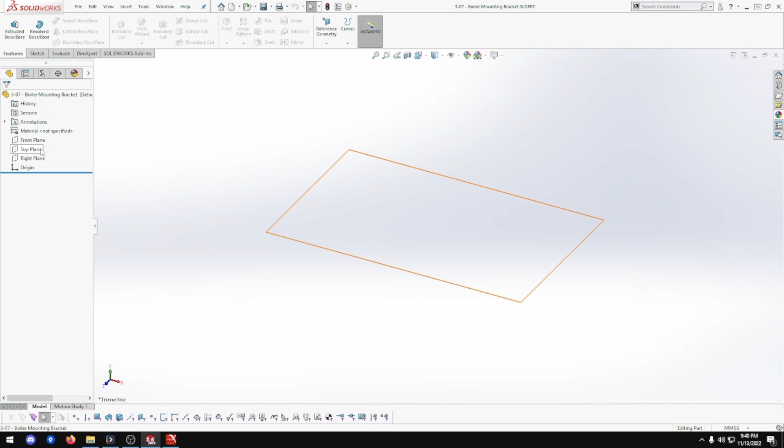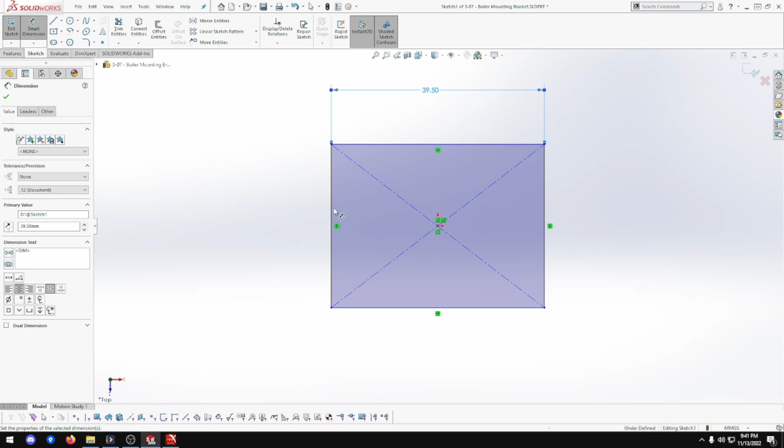Okay, let's go on the top plane, sketch. We're going to do that one. Smart dimension. That's going to be 39.5, and that's going to be 32, and we're going to do an arc from there.

I want to go the other way. Okay, cancel that, let's do that again. That one, so go to this point here first - first time I use this - that point there, then go that way.

There's that one, but that's going to be a radius of 127. So smart dimension - 127. Beautiful, that's good. Bring that in there a bit. There we go.

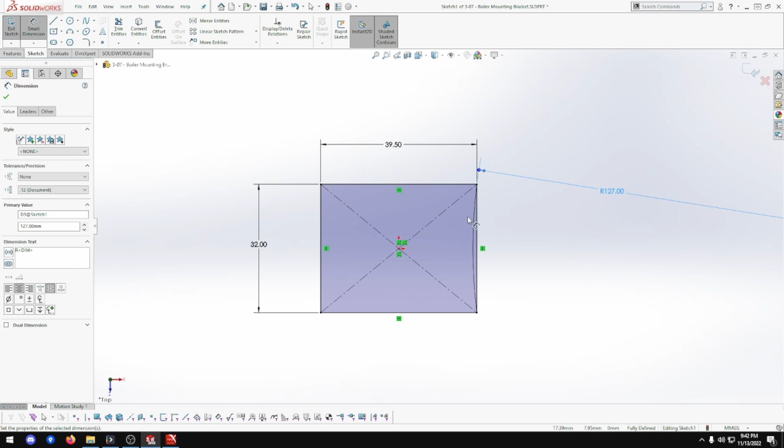Now we want trim, that one there, which will trim that. Beautiful. And that is going to be 5mm thick. Actually hold on, before we do it, there's two circles, we can do that as well. So 16 by 16, but the circle is 8. Let's do that circle.

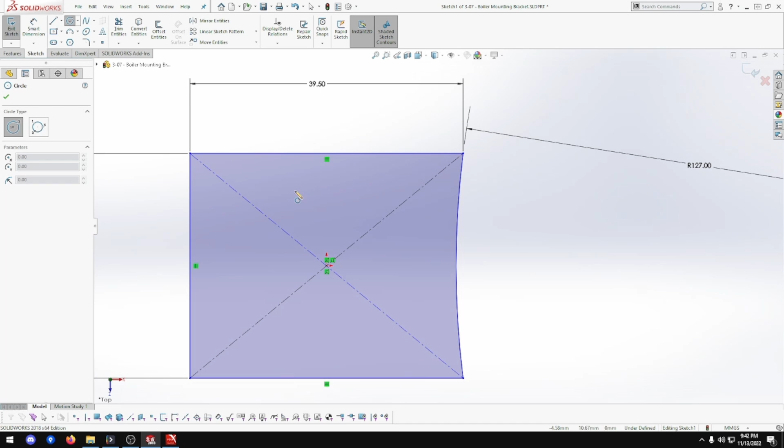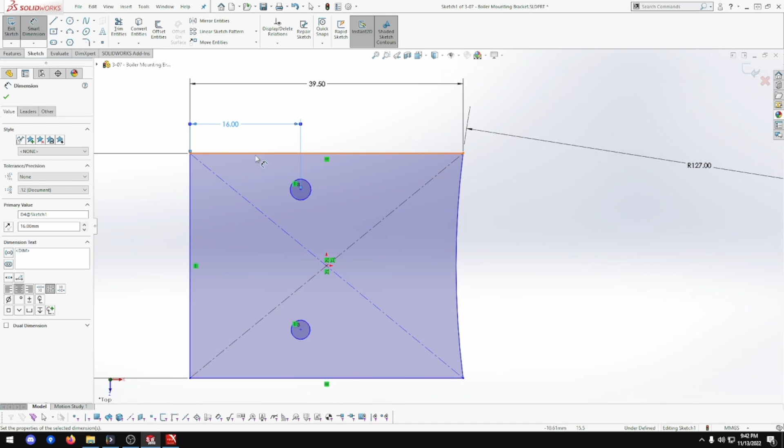Just put it there. Click outside, unhighlight that one. We want that point to be vertical. We want smart dimension - that's going to be 16, wasn't it? Yep, 16. Let's click on that one, drag it in. Ooh, why'd that move?

Something broke on that when I did the cut. So let me just put that one - oh, 19.75, yeah that's right. Okay, there we go, that's locked it back in, so now it won't move. Excellent, so let's just get a sketch, move that up - okay, nothing moves now. So taking that line out breaks it, like breaks the locked-in set if you like, but putting that measurement in fixes that up.

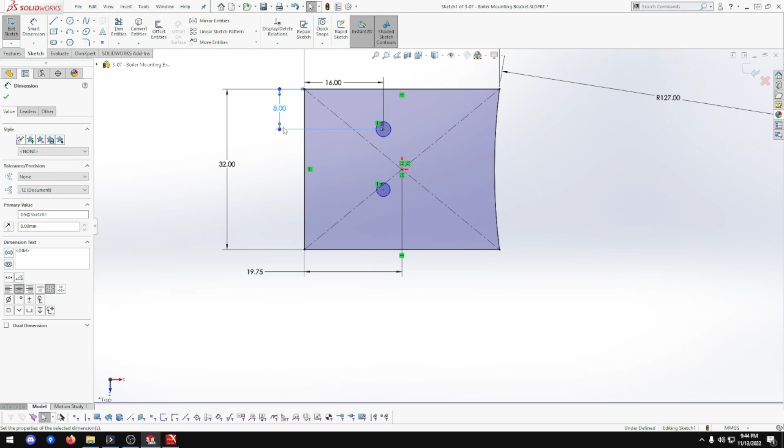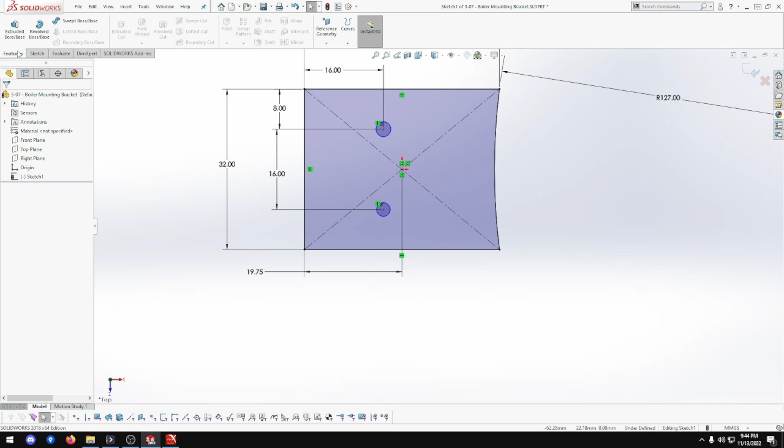Hold on, oh hold on, that should be 8, sorry that should be 8. And this one here, I didn't move after all - 16, that's better, so that's 16. Yep, that's 16 there. We're going to have a radius 8 there, but I'll use the chamfer on that. So that's good, this goes through those 5 - yep, 5mm. Mid plane, and done.

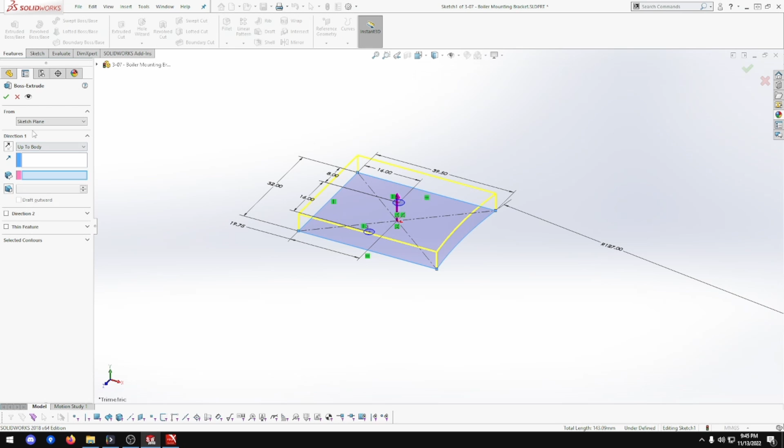Oh, because you got that hole there and that hole there. Select one's plane. What's that not selecting? Select the solid surface body to complete. Maybe that. Okay. Oh sorry, mid-plane, I didn't realize I clicked on up-to-body by mistake. Mid-plane is what I wanted. 5 mil and done, there we go.

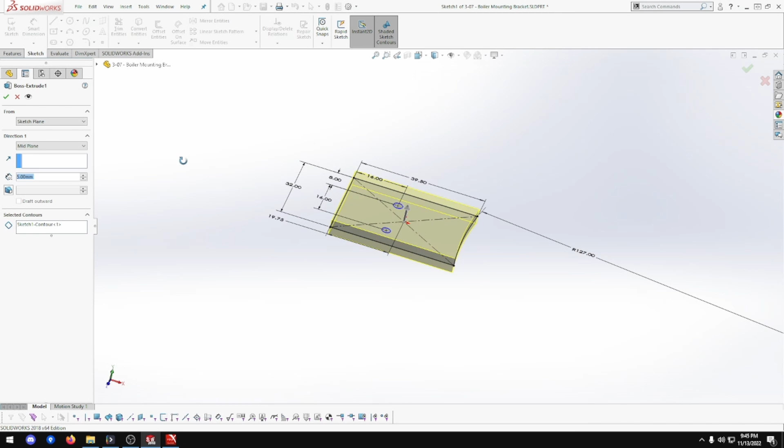Oop, where's the holes going? Hold on. Sketch - no, that one. Where did the holes go in? Oh I never, okay let me get out of that. Let me do that one. The holes are 8 mil. Well, that should still work though.

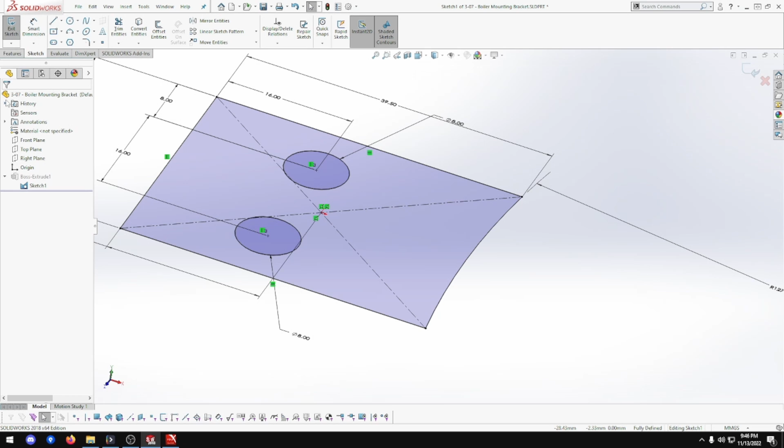Okay. That's a sketch. Okay, why didn't that work? Do that again, and why does that look so big? Hold on, something's not right. Those holes are too big.

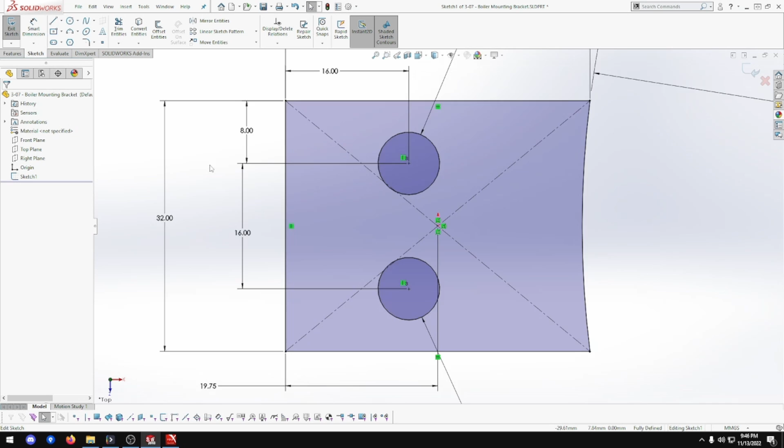Sketch. 39.5. 16. 8. Oh, I looked at it - I'm an idiot, I looked at it wrong. Okay, let me just delete that one. Let me delete that one. This wasn't - oh sorry, yeah there. Delete that one, this should be 50, not 32. Sorry, I looked at the measurements wrong.

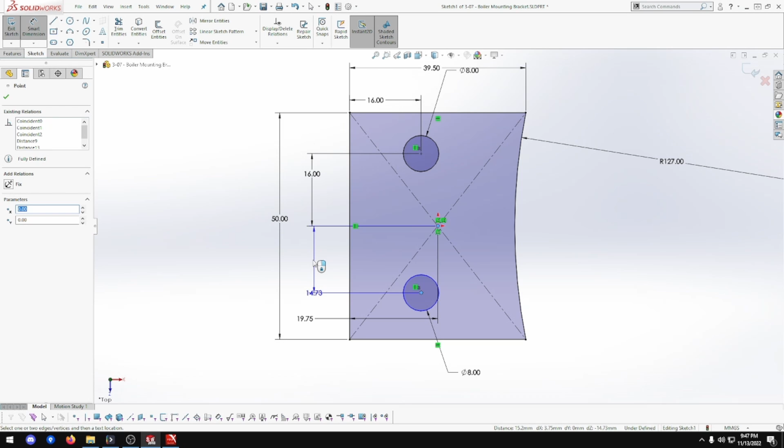Okay, that's looking better, bring that one down. Smart dimension from the center point to that one is 16. Center point to that one. Been a long day at work, I'm tired, so okay, that's done.

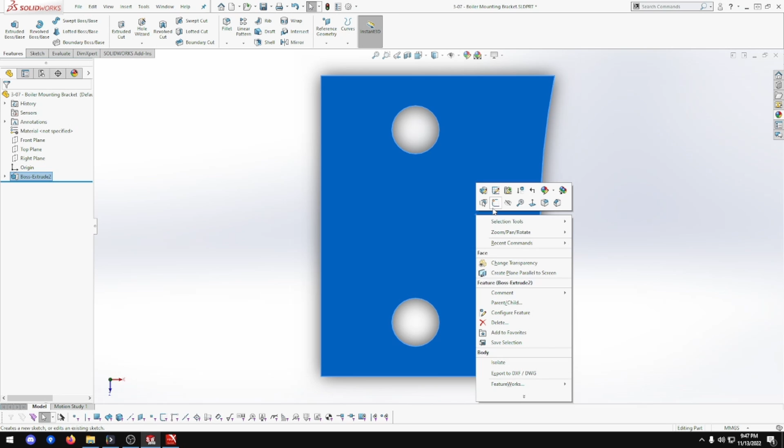So now we go feature, extrude, mid-plane - okay, there we go. That's better, that's better. Okay, go back onto this one and normalize and sketch. So we want this curve here again, which will do this one, to that one to that one. There we go, it's locked in.

We're going to do another one from there to there to there. Now, these two should be - what's that - make concentric, which makes it parallel in a sense, but parallel straight lines. So let's see, before we forget, well that line, beautiful. That line to that line, that should lock it in, beautiful. But we need a measurement which is 5 mil from there to there, 5 mil, beautiful.

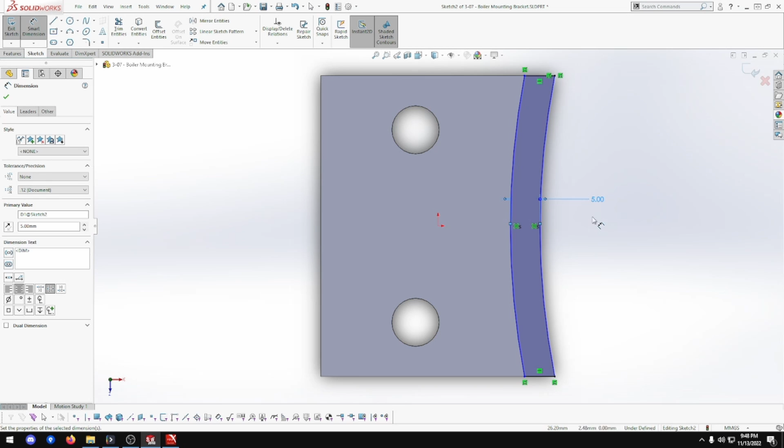And that's going to be a height of 20 mil. Looking good, yep looking good. That's going to be a height of, leave that blind, 20 mil. And okay. There we go, looking good.

Still got to do these corners, but we've got to do these corners too, and they look like the same. Doesn't have a measurement on this curve, but there is a curve there. So let's go to fillet, it's going to be 8 mil. Yep. One there, one there, one there, and one there, and done. There we go, that should be done.

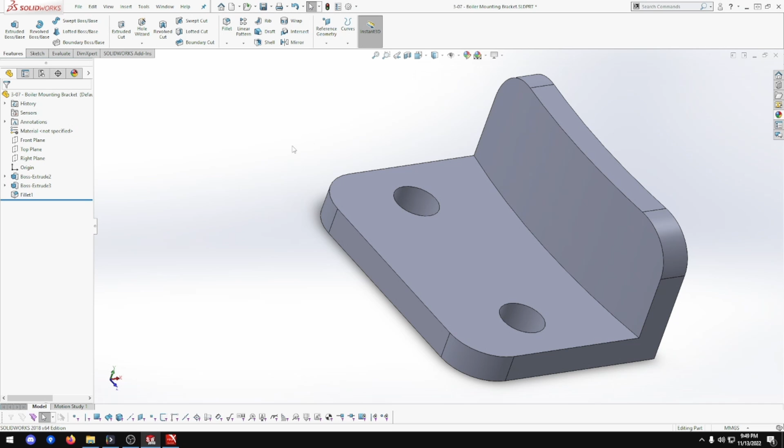Actually, there's a slight curve in here, let's do another one, but let's do that 2 mil, see how it looks. Right there. And there. Yeah, looks good, that looks good, yep. Okay, that should be done.

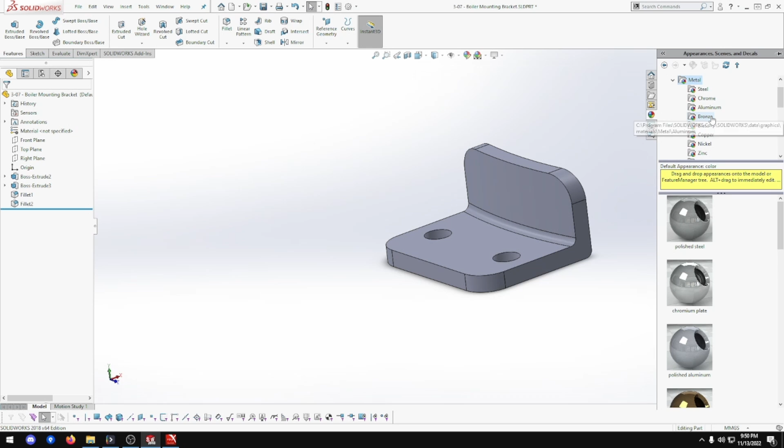25, 16, 5 and 5. Yep, okay, let's add some color to that, with paint appearance, metal - where's metal gone? Up there. Let's do the bronze, bronze brushed. Bronze brushed - oh, that's how it should have been said.

Okay, so that's part 3-07, boiler mounting bracket for the Clayton Undertype steam wagon.